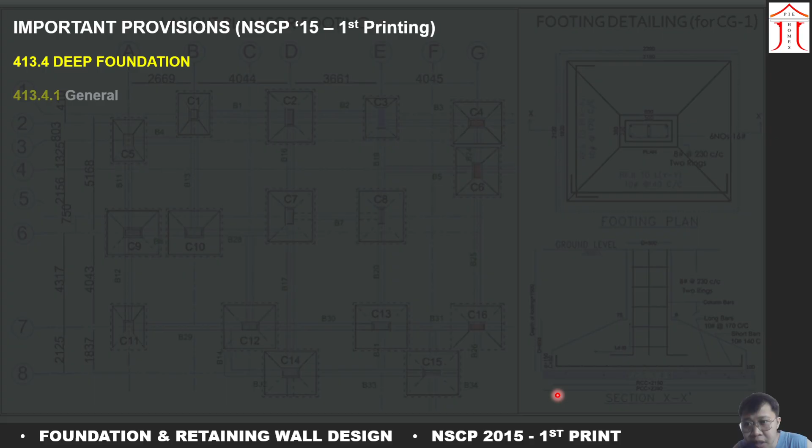Deep foundation, nasa section 413.4. For the general, the number and arrangement of piles, drilled piers, and caissons shall be determined from the unfactored forces and moments transmitted to these members and permissible member capacity selected through the principle of soil or rock mechanics. Meron itong similarities doon sa isolated footing.

For the isolated footing, ginagamit natin ang mga unfactored forces and moments or what we call the service loads to determine the area. This time naman, kapag deep foundation, ang area na ng bawat piles ay already known. So ang unfactored forces and moments naman will determine how many pieces of piles ang kailangan natin to resist such forces. Number naman ang inaalam natin dito. And yung arrangement, ikaw na bahala, depende kung ilan yung lalabas na bilang.

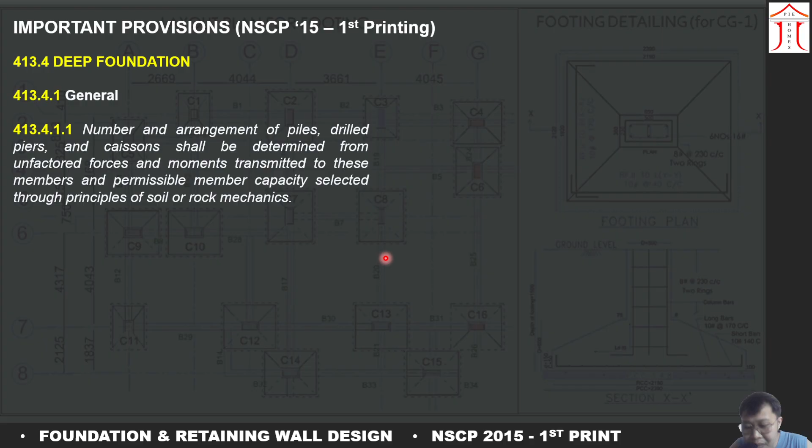Pile caps. The overall depth of the pile cap shall be selected such that the effective depth of the bottom reinforcement is at least 300 mm. Yung pile cap dito, ito yung malaking slab na pinapatong natin doon sa piles. And according sa NSCP natin, ang minimum effective depth natin shall be 300 mm.

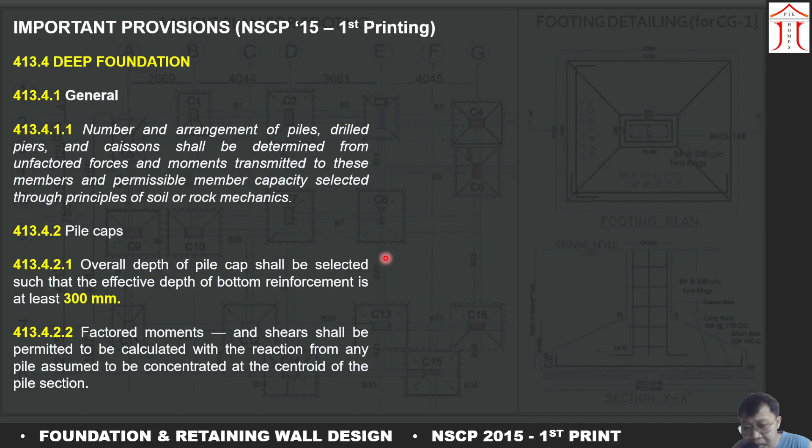Next, the factored moments and shear shall be permitted to be calculated with the reaction from any pile assumed to be concentrated at the centroid of the pile section. Ang sinasabi lang dito, lahat ng mga moments natin, lahat ng mga shear forces natin will act at the center or the centroid of the piles.

At yung last provision na very important din is yung 413.4.2.5, calculation of the factored shear of any section through a pile cap shall be in accordance with from A to C po ito. Ito yung sinasabi ng A and B, pero pasadahan na natin yan kasi ang pinaka-importante sa tatlong ito ay yung letter C.

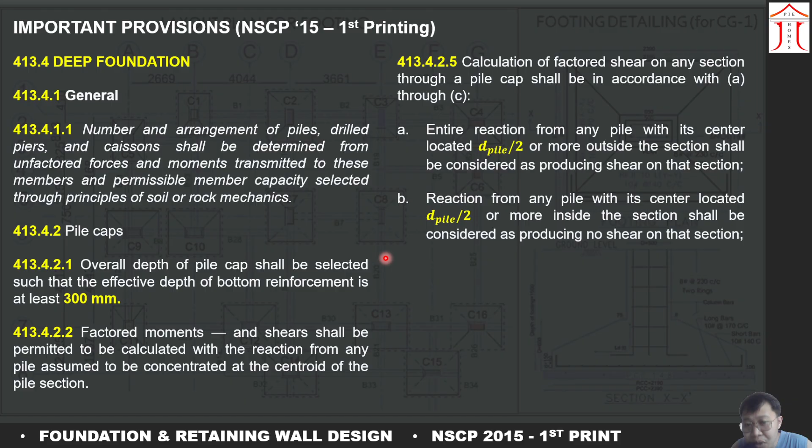For intermediate positions of the pile center, the portion of the pile reaction to be considered as producing shear on the section shall be based on a linear interpolation between full value at d pile over 2 outside of the section and zero value at d pile over 2 inside the section. Parang ito lang din naman yung sinasabi niya ng A and B. Outside section na d pile over 2, then from the center inside the section d pile over 2. So yung C dito is parang summary lang nitong A and B.

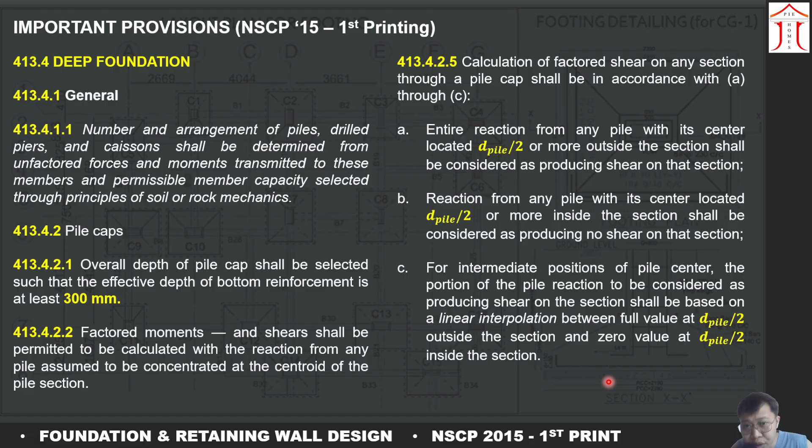Mamaya makikita nyo, or later in the later video malalaman ninyo kung ano yung importance nitong C natin dito sa 413.4.2.5. And then for the pile foundation, this is the general definitions natin para sa pile foundation.

It is one of the deep foundation type. It can be defined as a slender column or a long cylinder made of concrete or steel used to support the structure and transfer the weight to the desired depth by end bearing or skin friction. Pile foundations are typically used for a large structure and in situations where the soil at shallow depth is not suitable to resist excessive settlement, resist uplift, etc.

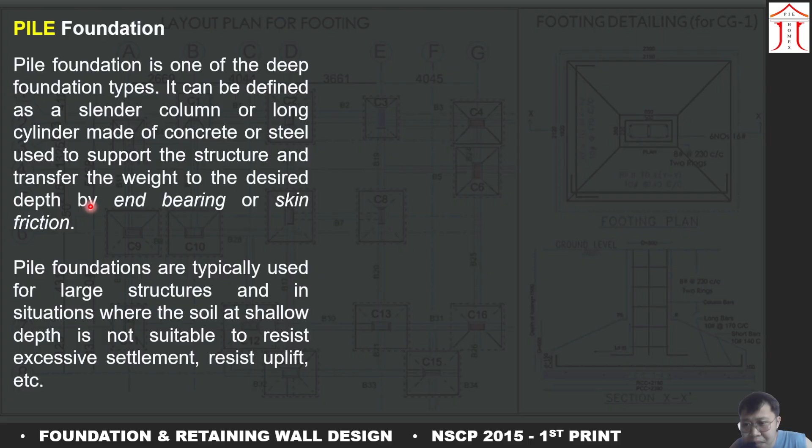Ang pile foundation, essentially, ginagamit lang kapag sa mababaw na parte ng lupa natin ay malambot pa. Kailangan natin maghukay ng mas malalim para ma-reach natin yung pinakamatigas na strata ng lupa natin. At sabi nga dito, by end bearing or skin friction yung magiging resistance ng bawat piles natin.

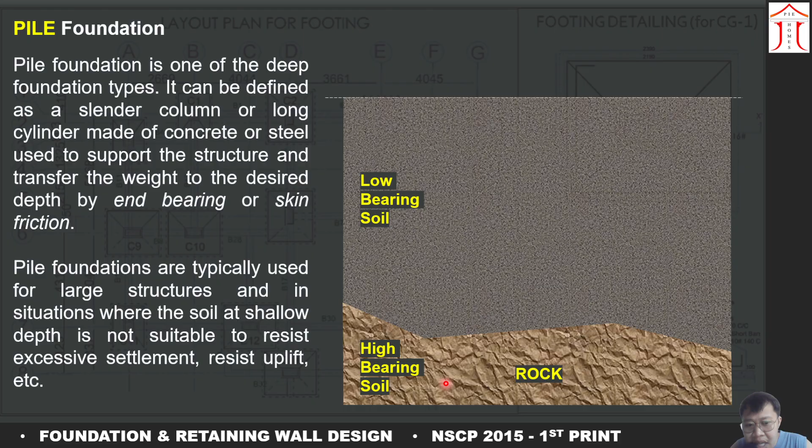So for example, we have here a soil profile. Say, for example, this part right here is a low-bearing soil, and then yung nandito sa baba ay yung tinatawag natin na high-bearing soil. Ito mas matigas, mas malaki ang kanyang resistance. And then, we call this the rock. Of course, that's the most common example ng high-bearing soil.

For example, we have here a pile na reaching up to the hardest part of the soil which is yung rock. Ito yung tinatawag natin na end bearing. Yung dulong parte ng pile natin, yung nagre-resist or merong resistance. Yun yung tinatawag natin na by end bearing dito.

And then for example, pwedeng hindi umabot yung ating piles dun sa pinaka-ilalim na parte. By skin friction naman yung resistance ng ating piles. Ibig sabihin yan, dun sa surface area ng piles natin, merong mga maliliit or may gasgas na nangyayari doon, friction. Itong friction na ito, siya na yung mismong nagre-resist nitong potential force natin na P dito.

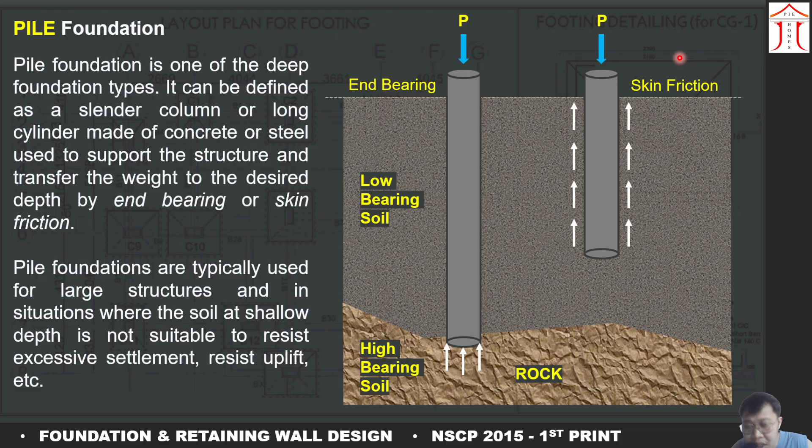Ito yung geotechnical part ng ating pile foundation. We will not focus on this one kasi ang main subject natin ay foundation and retaining wall design, so yung RC, reinforced concrete lang na part yung pag-uusapan natin. Pero pasadahan din natin yung mga importanteng formula for geotechnical engineering. Imagine we have here a pile and then having a cross section or area at the base at AB.

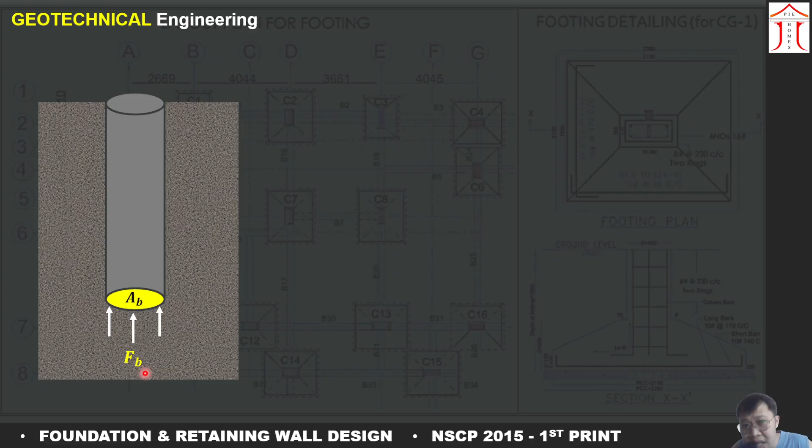Okay, dito merong end bearing na nangyayari, tawagin natin yung force bearing, FB. Itong bearing force na to, meron tayong formula from geotechnical engineering, CU NC AB. Define natin yan maya-maya kung ano mga yan.

At saka para dito sa surface portion ng ating piles, meron din tayong tinatawag na frictional force o FF. Yung formula naman nito ay CU P alpha L.

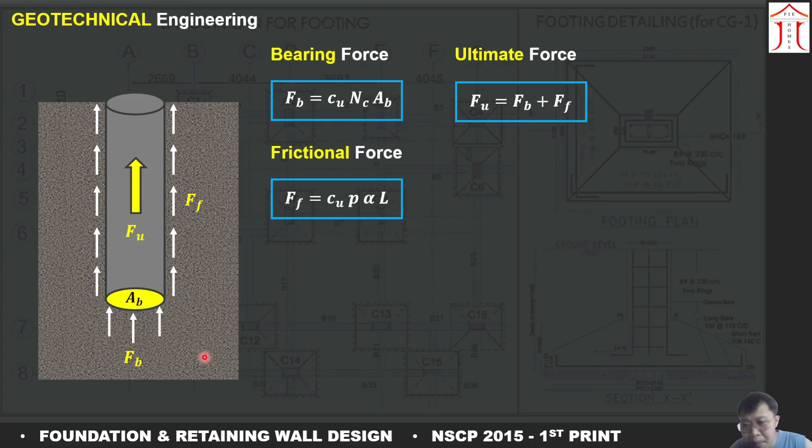At saka yung total na forces nung dalawa, tawagin natin FU, or the ultimate force, which is equal to the bearing force plus the frictional force, FB plus FF. Ire-resist nila yung RU natin. Meron din tayong allowable force which is equal to the ultimate force, FB plus FF.

We divide this by a factor of safety, and makukuha na natin yung allowable force na to. Take note that this allowable force must be greater or at least equal to the reaction acting at this pile. Again, yung allowable para safe tayo must be greater or equal to the reaction.

Kapag yung allowable natin mas mababa dito, masisira na yung piles natin. Pwedeng mag-settle, pwedeng masira ang entirety ng ating piles. Okay, so ito yung mga definitions natin.

For CU, that is the cohesion of the soil. Kung magkakaibang layer of soil, ibig sabihin per layer magkakaiba yung CU. So isosolve mo yung accumulative na FB niya, accumulative na FF, ganon.

Then NC is the bearing capacity factor. If no given, we use 9. Alpha is the adhesion factor or the frictional constant. L is the length of the pile, P is the perimeter of the pile, AB is the area of the base of the pile, and RU is the net reaction of the pile.

Okay, so ito yung geotechnical na part which hindi naman natin ifo-focus. Pasadahan lang natin.

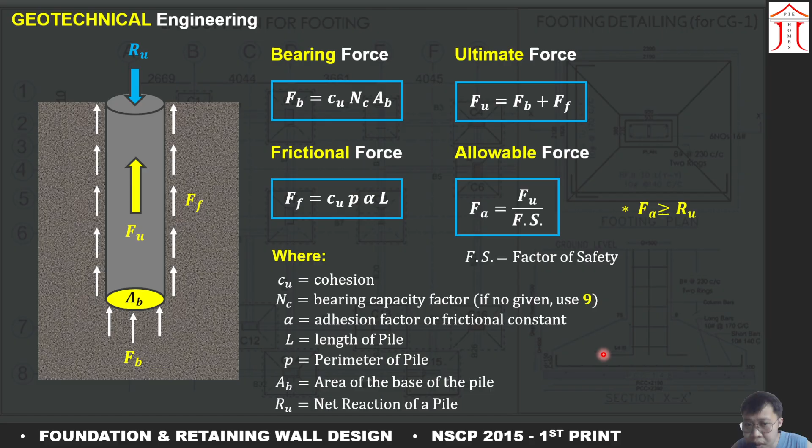Okay, so we have here pile cap versus piled raft. Minsan nalilito. Ang isosolve lang natin for this topic is focus lang tayo sa mga pile caps. Kapag pile raft, medyo mahaba yung solutions nito. Pile cap lang po tayo magfo-focus.

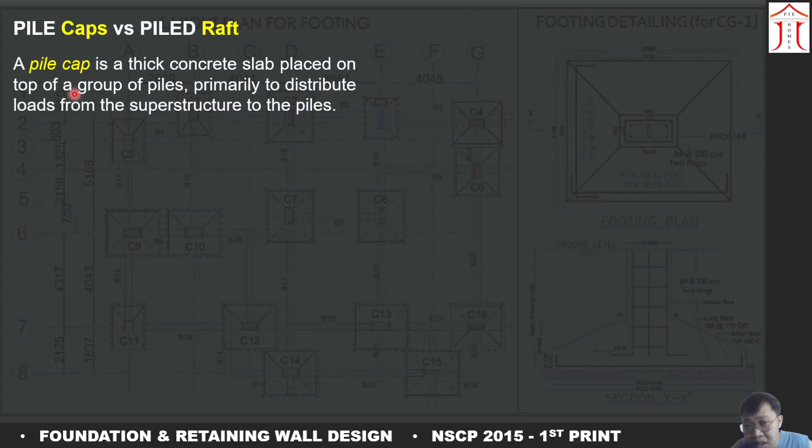Pile cap is defined as a thick concrete slab placed on top of a group of piles, primarily to distribute the loads from the superstructure to the piles. Kanina dinefine na natin sa NSCP natin kung ano ba yung minimum effective depth nitong pile cap na to. Parang pinatong, kumbaga.

At saka ang pile raft naman is it uses both the piles and the raft, which is a large concrete slab, to distribute the loads to the ground with the raft acting as the main load-bearing element. Bigyan natin to ng figure para mas ma-imagine natin ang difference nitong dalawa.

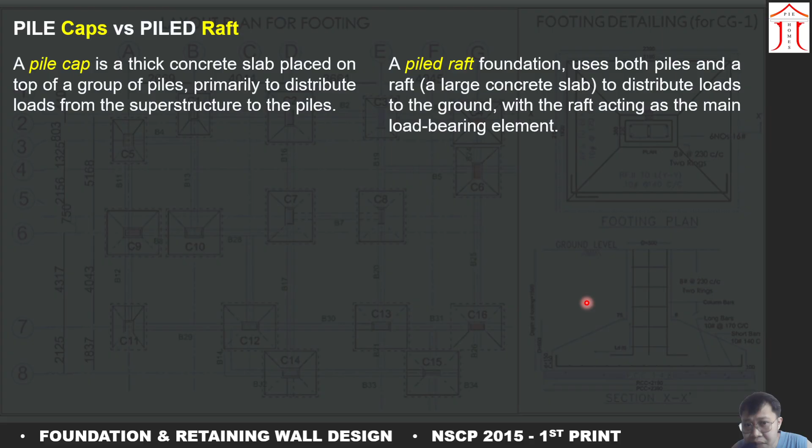Ito yung parehas na soil profile natin on both. Ito yung mga piles natin, at ito yung pile cap. Ang sinabi dito, placed on top of a group of piles. Pinatong mo lang yung makapal na slab na yan. Ito yung pile cap na tinatawag natin.

At saka para sa pile raft naman, ang tawag natin dito ay raft, yung makapal lang din na concrete slab. Halos magkamukha ito, kaya lang merong significant difference itong dalawang ito.

Itong pile cap natin at piled raft natin ay nakakaranas or binubuhat nila yung superstructure natin sa itaas. For pile caps, meron lang resistance yung ating mga piles dito sa ilalim. Ang nagre-resist lang sa pile caps ay yung mismong piles natin, kaya nagkakaroon ng end-bearing forces dito sa mga piles natin.

Wherein sa pile cap naman, yung ilalim nitong pile cap natin, yung lupa dito sa ilalim, dahil nakapatong lang naman literal itong pile cap natin, wala pong bearing forces o walang nararanasang stresses yung lupa dito. Yung piles lang ang nakakaranas.

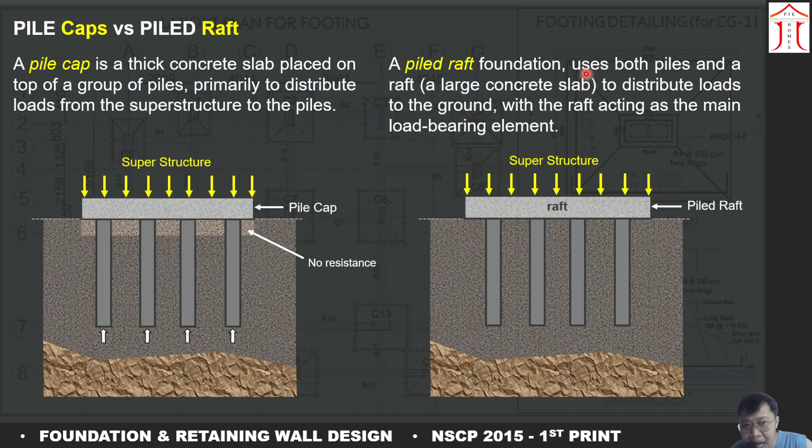For pile raft, it uses both the piles and the raft to distribute the loads to the ground. Meron ng resistance yung piles mo and at the same time, yung lupa sa ilalim ng raft natin meron pang resistance. Dalawa bale ang nagbubuhat: yung end bearing para dito sa mga piles natin and yung bearing dito sa mismong lupa natin sa ilalim ng raft natin. Ito yung difference ng dalawa.

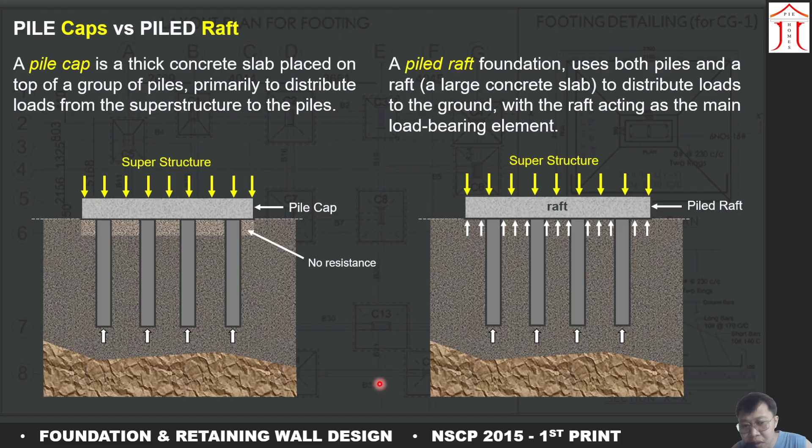Kapag ito yung problem natin, madami tayong isosolve na mga pressures. Merong reactions para sa mga piles, meron pa tayong pressures para sa ilalim ng lupa. Ito lang po yung gagawin natin for this video, yung pile caps lang po tayo. Ito yung big difference ng dalawa.

Imagine meron tayo dito yung Burj Khalifa, ang most famous building, ang tallest building as of the moment. Dahil malaki-laki tong building na to, tapos pinatayo sa sandy na lupa, pile foundations ang ginagamit dito, essentially pile foundations sa mga madisyerto. Imagine, paano kaya kakayaning i-resist ng piles yan? Halimbawa, patalunin natin yung Burj Khalifa natin, masisira nga ba yung piles natin sa ilalim? Hindi naman po basta-basta yan nasisira dahil nakadesign nyo naman ito ng maayos.

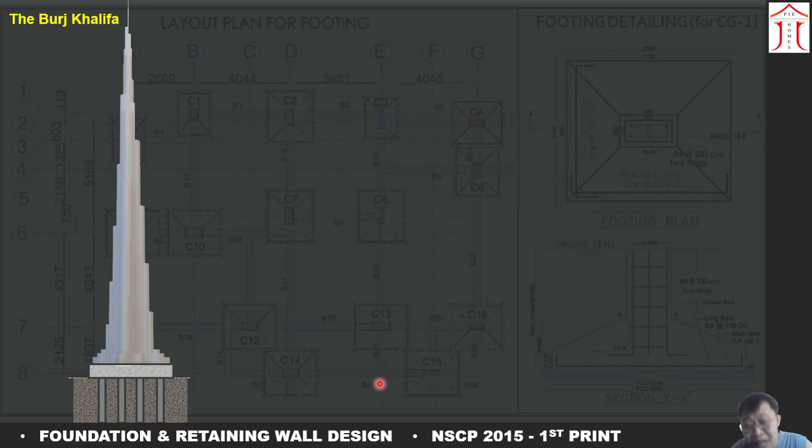Ito yung piles natin, ito yung pinaka-base footing nung ating Burj Khalifa, and you can see here na napakaraming piles ang ginamit para dito sa Burj Khalifa.

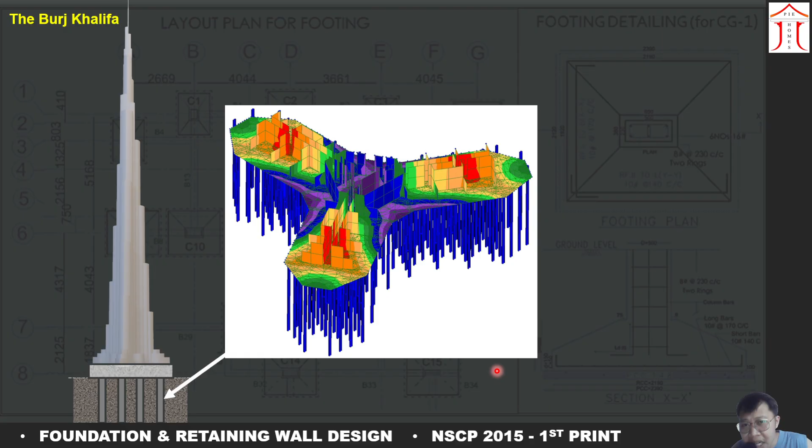Fact: Burj Khalifa's foundation utilizes 192 piles to support the massive weight. These piles are 1.5 meters in diameter, 43 meters long, extending into the ground to a depth of 50 meters, reaching a stable bedrock. The foundation also includes a 4-meter concrete slab, which is our raft, resting on these piles.

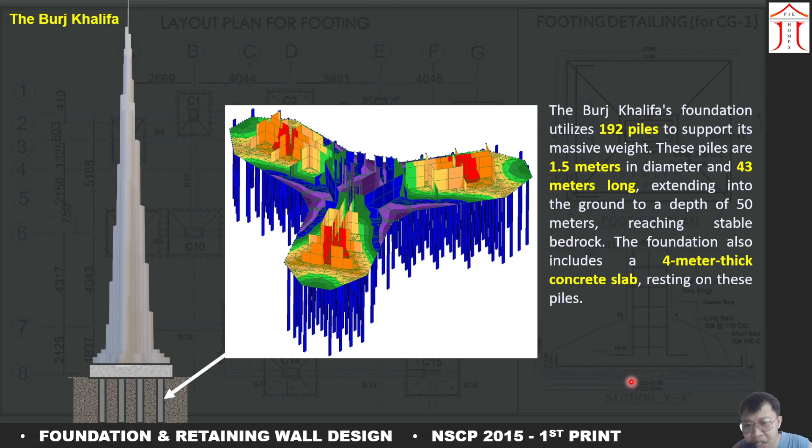Alright, 192 na piles, 1.5 meters ang kanyang diameter, 43 meters long. Imagine that, sobrang dami at malalaki talaga. Hindi yan basta-basta masisira, kaya-kaya naman i-resist nito. Ang galing lang nung pagkakadesign nito nung Burj Khalifa.

Alright, now we proceed to the calculation. Ito yung pile reactions natin, kada isang piles i-derive natin yung kanyang formula. Imagine here we have a footing or slab, kunyari muna, meron na tayo dito ng centroid given by this x-axis and y-axis.

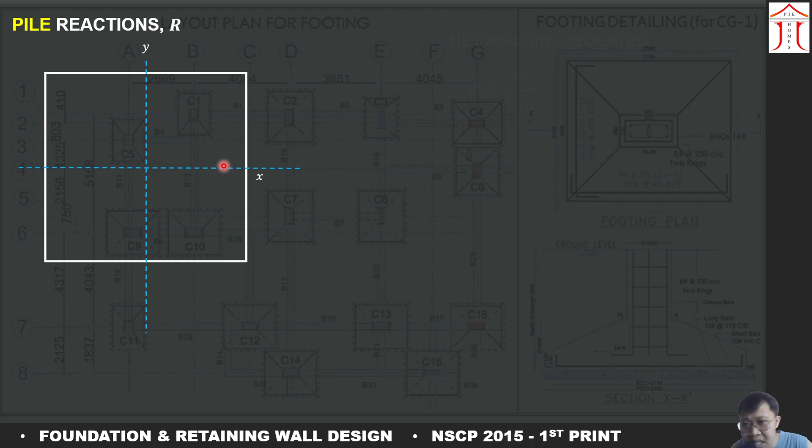Recall natin that the net pressure sa isolated footing is very simple. The net pressure under the footing for isolated is simply equal to the load acting or acting at the column carried by the footing, force divided by the area of the footing. Ito yung napakasimpleng formula natin, force divided by area, ito yung pressure, kung axial lang.

Pero kung may mga moments, nag-iiba ito, minomodify natin ng konti. Meron tayo dito ang dinadagdag: nilalagyan natin ito ng plus minus mxc over ix and plus minus myc over iy. Ito yung general na formula natin for the bending stress, mc over i.

Kung nasaan yung nako-compress na part, yun yung plus sign, nadadagdagan, nako-compress, mas nai-stress. Kung nasaan yung tensile na part dito, measuring from this centroid, ito yung reference natin, kung nasaan naman yung tension, yun naman yung negative dito, yung magma-minus. Ngayon, hiramin natin itong formula nito.

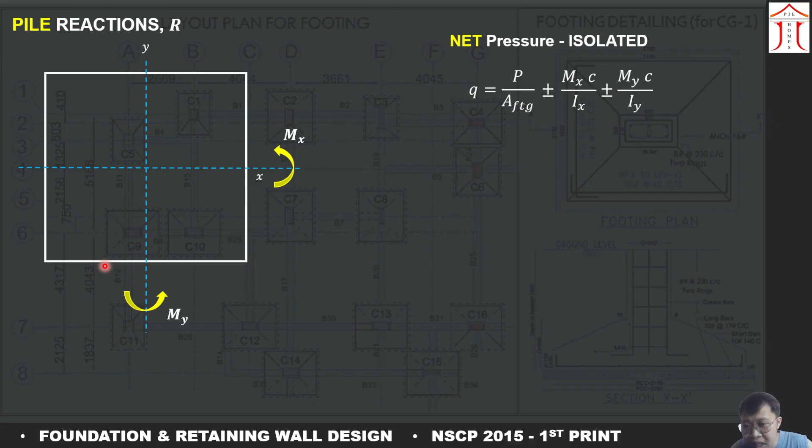Yung sa isolated footing, i-refer natin o i-compare natin sa piles. Ngayon, instead na isolated footing, gawin natin itong parang pile cap. Sa pile cap, dahil pile cap na yan, nakapatong yan sa mga maraming piles. Ito yung piles natin sa ilalim ng lupa.

Mag-derive naman tayo ng formula kagaya nito, very similar to that one. Ito naman yung derived na formula natin for piles. I-compare natin isa-isa.

Itong P dito, this is the actual load acting, at ito pa rin naman yung actual load na yan. However, yung area ng footing natin, dahil piles na yung pinag-uusapan natin, area ng isang pile, we multiply it to the number of piles. Yun yung total area ng isang pile. Itong pile foundation natin, yun yung total area niya.

Kaya n times area of one pile, number of piles times area of one pile. Yun po yung formula dito, parehas pa rin naman halos, di ba?

Tapos dito naman plus minus mx y over ix plus minus my x over iy. Yung c dito, para sa isolated footing, ang ginagawa natin sa C, it is measured from the center to the edge, dun sa pinaka-corner, sa edges. Doon natin sinusukat yung mga C dito.

Ngayon, dahil piles na yung pinag-uusapan natin, hindi na natin kinukuha hanggang doon sa pinaka-edge ng bawat pile cap natin. Hindi ganun ang gagawin natin dito. Instead, kukunin natin sa centroid nung mga piles natin. Dito sa centroid natin, kukunin natin hanggang dito sa center nung next na pile na malapit. Yun yung mga Y dito, yun yung mga X dito.

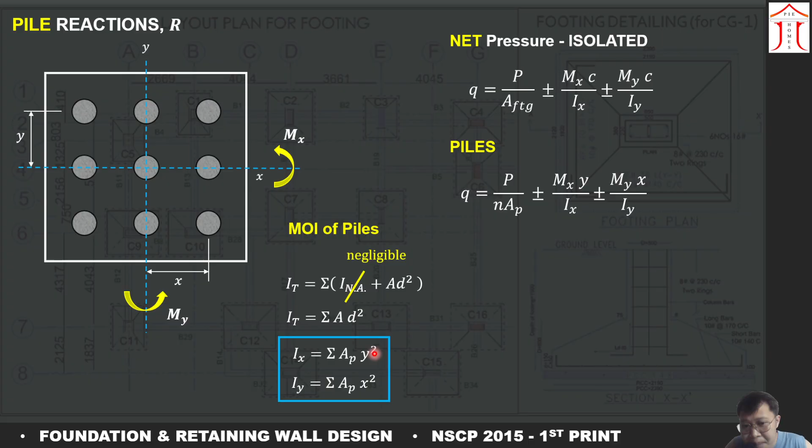Saan? Gaano kalayo? Para dito sa X natin, okay? Dapat naka-refer siya dito sa X-axis. Kaya tinawag na IX. Dapat yung mga distances natin ay puro Y. Yung IX nandito sa base ng X-axis. Kaya yung mga distances natin ay dapat mga Ys. So, area ng piles, summation lang natin, times the Y axis squared or the y distance squared.

Okay? And then for IY naman, ito yung magiging base mo, yung y-axis. Lahat ng mga d-distance dito ay dapat mga x's. Mga x yung distance niya. Kaya x square po dito.

Okay? So from this formula, pwede na natin tong i-simplify pa further. Now we can say, yung ix and iy, palitan na natin summation of area of the piles, y square, tapos summation of area piles, x square naman. So, ito na yung formulas natin.

And then, pwede pa natin tong i-simplify further. We multiply, okay, dito sa left and right ng area ng piles. At then, yung Q times area ng pile, tawagin na lang nating resultant or reaction. Again, this is pressure. Pressure times area is actually force. So, yung force na yun, tawagin nating reaction. Yung R dito. Yung Q times AP, that is now the R.

Okay? So, dito sa first term natin, magkakancel yung AP. Kaya dito, P or the actual force divided by number of piles na lang yan. Tapos dito, cancel na yung AP. Cancel na rin yung AP dito. Kaya ito yung final formula natin for the reaction of a given pile. Again, the reaction is equal to P over N plus minus MXY over summation Y squared plus minus MYX summation X squared. Alright, so let's have an example muna mamaya.

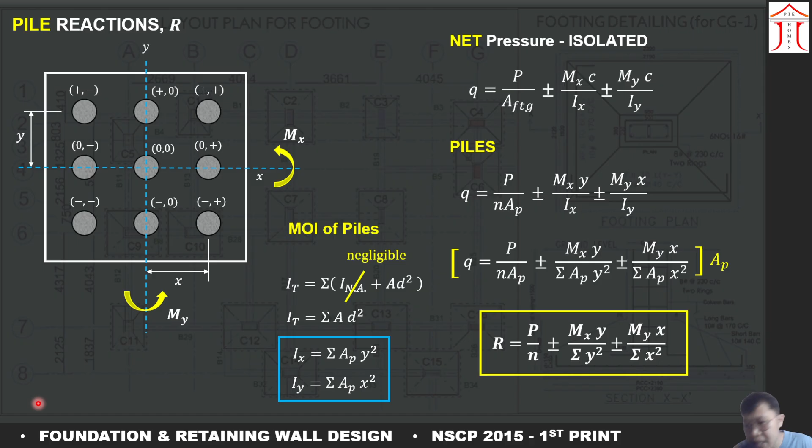Okay, so ito yung summary. Let's have an example dito.

Okay, so first we determine the summation of x squared and the summation of y squared dito, kasi kailangan natin ito sa formulas natin. Kailangan nating i-master muna kung ano yung summation x squared dito at ano ang summation of y squared. So for our solution, we have here the summation of x squared.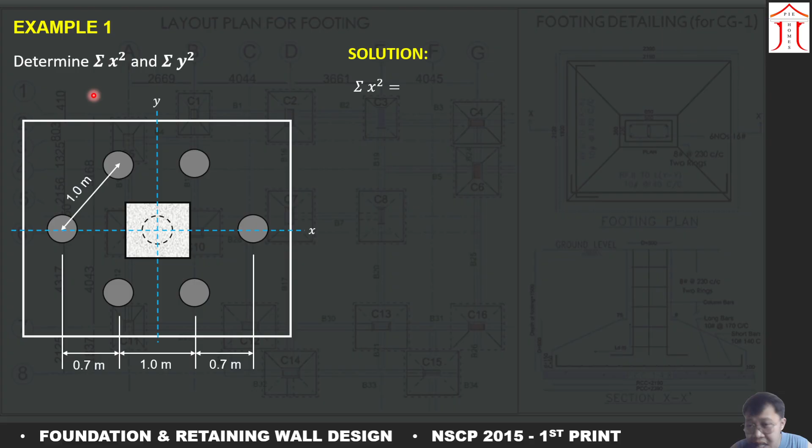Lahat ito ay mini-measure dapat sa y-axis, dahil mga x distances ang gusto nating malaman. May mga given naman na tayo dito: yung distance ng pile to pile ay 1 meter, at hanggang dito ay 0.7 meters, parehas dito sa kabila, ito ay horizontal distance. At meron tayo dito ng slanting distance na 1 meter.

Unahin natin yung summation x squared dito. Yung mga x natin ay dapat measured from the y-axis, papuntang right then papuntang left, parehas yun na x distance. It doesn't matter kung papunta man ng right or papuntang left, i-square lang din naman natin so magiging positive na yan, actually positive na lang lahat yung kukunin natin dito.

Alright, so itong 1 meter, dahil nandito siya sa center, hahatiin natin to 0.5 dito, 0.5 din sa kabila. Next, ano naman yung distance nitong kabila dito? So that is now 0.7 plus 0.5, which is 1.2 meters naman yun.

Unahin natin yung nandito sa right na part. Ito yung center natin, unahin natin yung mga nandito sa right. So meron tayo ditong 0.5, itong pile na to ay 0.5 distance from the center, so that is 0.5 square. At ilan yung ganyan dito? Meron tayong dalawang piles na parehas 0.5 ang distance, kaya dito meron tayong multiplier na 2, 2 times 0.5 square, plus.

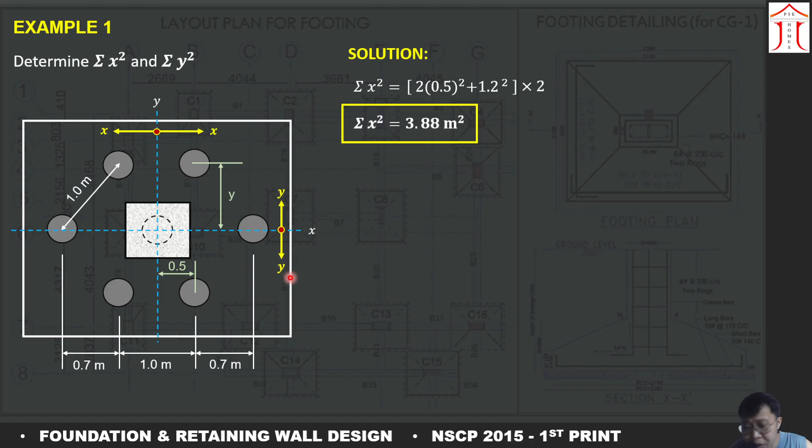So we can actually solve for the value of y, that is simply Pythagorean theorem. We know that this y distance here is simply equal to square root of 1 squared minus 0.7 squared. Hypotenuse, adjacent, so we can now solve for the opposite side. And the y here is equal to square root 51 divided by 10.

Now finally, pwede na natin kuhanin ang value ng summation of y square. Meron tayo ditong dalawang square root 51 over 10 square. Yung distance dito ay square root 51 over 10, i-square natin yan, tapos dalawa sila, times 2. At ito ay 0, ito ay 0 kasi nasa x-axis mismo. I-multiply lang natin ng 2 dahil para dito sa baba, similar naman sila. So finally, we can now have summation of y square is equal to 2.04 square.

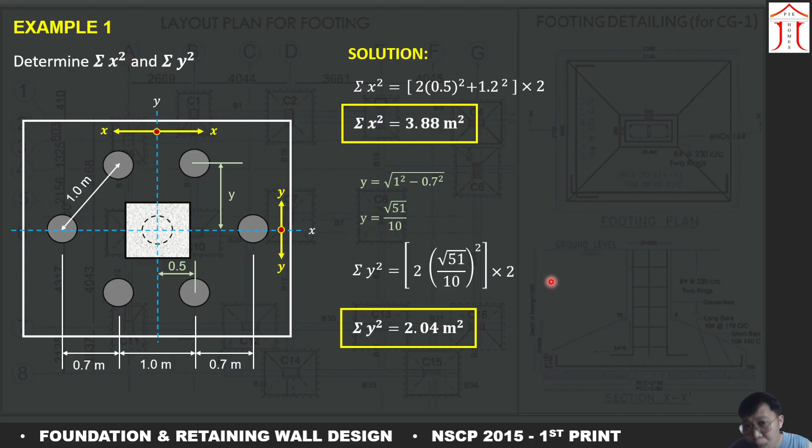So this is how to solve summation x squared and summation of y squared. Isa-isahin lang natin, kung magkakapantay na sila, i-multiply mo na lang kung ilan. At kung wala talagang kapantay, kailangan nating sukatin from the x-axis, from the y-axis. Okay, so yun lang.